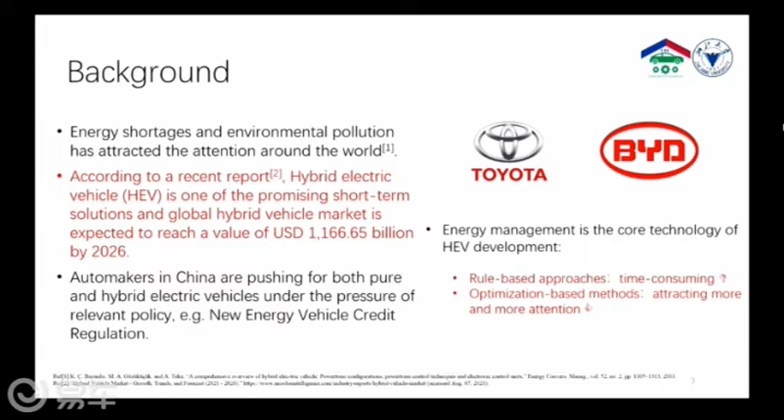As the core technology of HEV development, energy management is to coordinate the engine and motors or generators for optimized fuel economy. Rule-based approaches are still popular in real applications, but it is usually time-consuming. Optimization-based solutions are getting more and more attention from algorithm developers, which have the ability of capturing the entire problem. However, the optimal energy management problem is basically a nonlinear, constrained, and dynamic optimization problem.

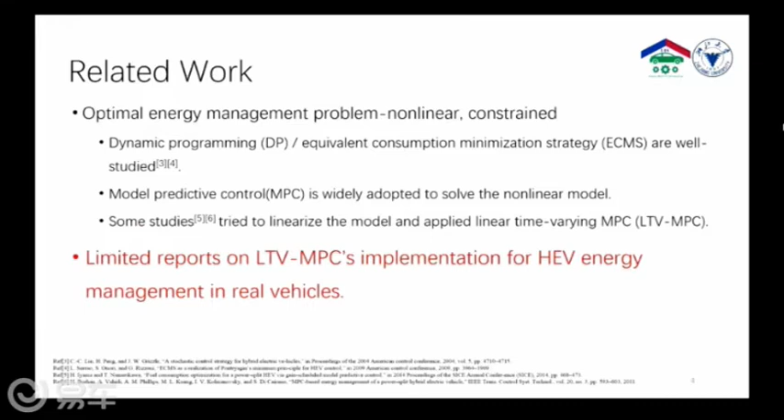Existing research is as follows. Dynamic programming or equivalent consumption minimization strategy are well studied. Model predictive control is also widely adopted to solve the nonlinear model, so it usually has the disadvantages of computing load and the difficult handling of nonlinear HEV models. Meanwhile, some studies have also tried to linearize the model and apply the linear time-varying MPC. However, there are limited reports on LTV MPC's implementation for HEV energy management in real vehicles. So, it's of great importance to propose a new LTV MPC algorithm and implement it on real vehicles.

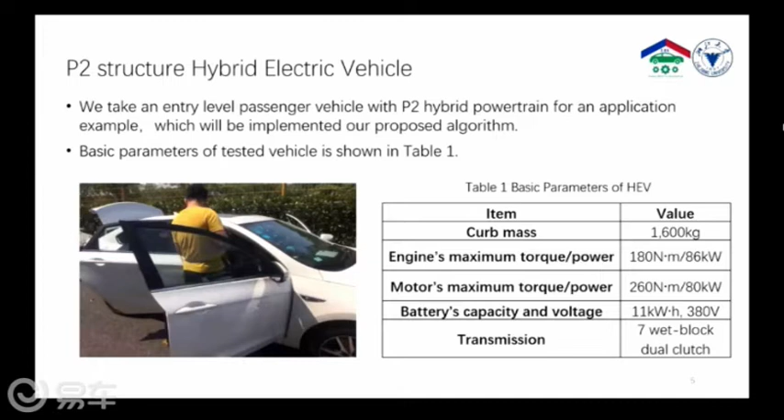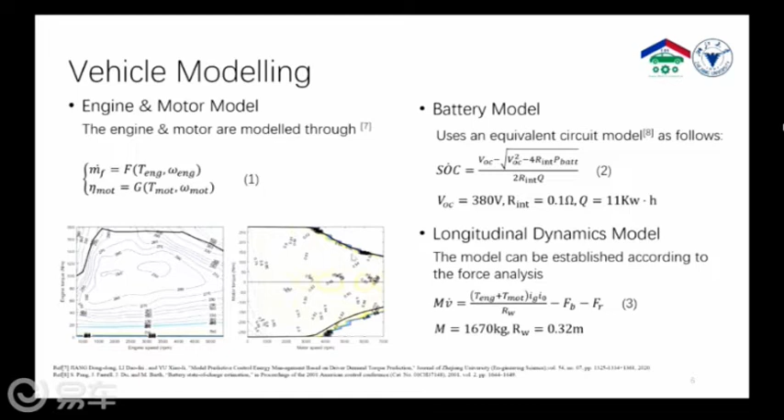As for the HEV, we take an entry-level passenger vehicle with P2 hybrid powertrain for an application example, with basic parameters shown in Table 1. Here shows how we briefly model the target HEV. The engine and motor are modeled with nonlinear functions f and g as equation 1, which is similar to that in our previous publication in reference 7. When modeling the battery, an equivalent circuit model from previous research is adopted, and the equation of SOC can be drawn as 2. As for the longitudinal dynamics model, it can be established according to the force analysis as equation 3.

For the MPC design, we firstly set the state variable x as V, SOC, and MF, continuous control variable U as T engine and T motor, the disturbance D as FR, and the output Y as V, SOC, and MF. Since the vehicle model has been established, we can obtain a nonlinear model of HEV by combining the above model equations. In order to linearize the model, Taylor expansion is adopted, and we can obtain equation 5, where system matrices are the corresponding Jacobian matrices of function f.

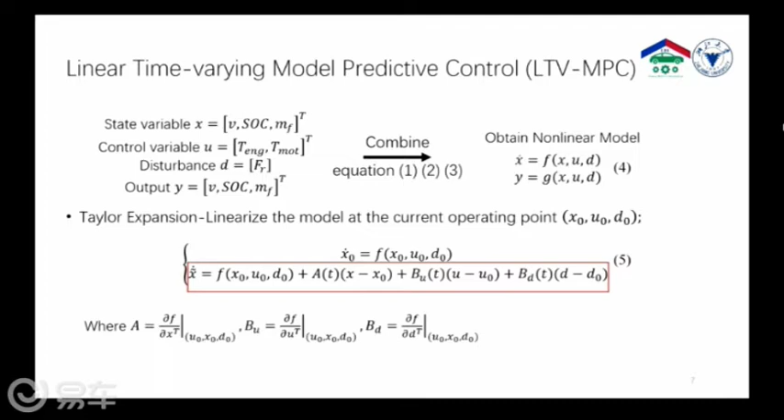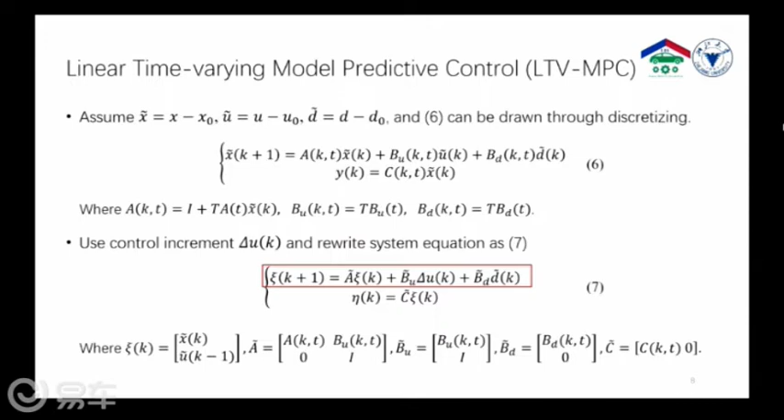Besides, the model needs to be discretized in order to be used in a real-time controller. Here we assume x tilde equals x minus x0, u tilde equals u minus u0, d tilde equals d minus d0. We can obtain 6 through discretizing, whose corresponding matrix is shown below. For the purpose of obtaining the optimal control variable, we rewrite the system equation as 7 by using control increment delta uk with matrices attached to it.

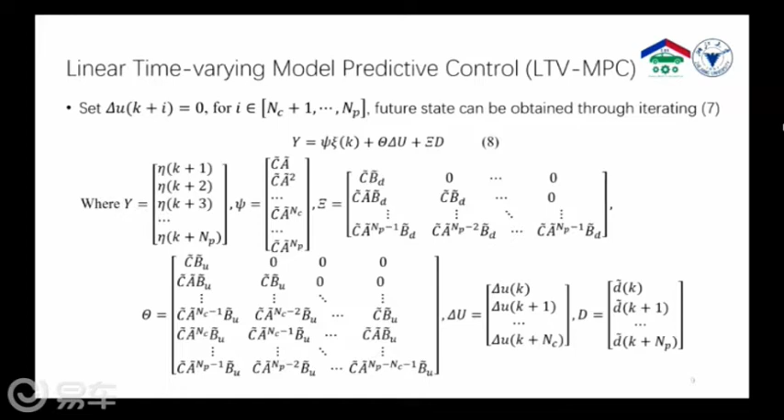We assume the prediction horizon as NP and the control horizon as NC, and set delta u k plus i as 0. Taking the state variable xk as the initial condition, the state 8 in the prediction horizon can be obtained by iterating equation 7.

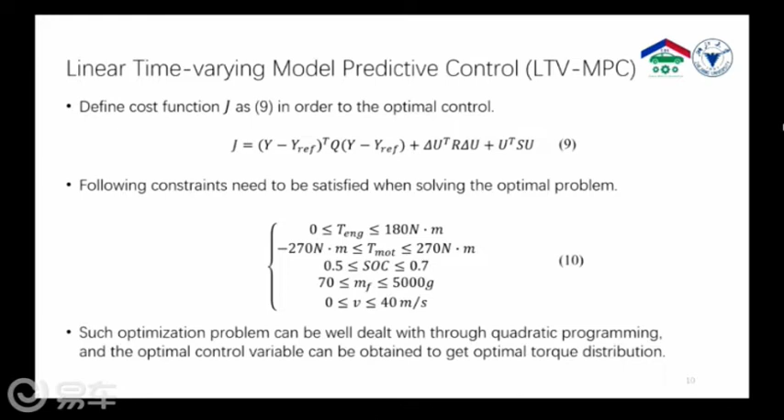To obtain the optimal control, we define the cost function J as shown in equation 9, including error between the actual output and the reference output value, control increment, and control magnitude. For the optimization problem, the following constraints need to be satisfied. For example, T engine has its maximum and minimum value as shown in equation 10. Thus, such optimization problem can be well dealt with through quadratic programming, and the optimal control variable can be obtained to get optimal torque distribution.

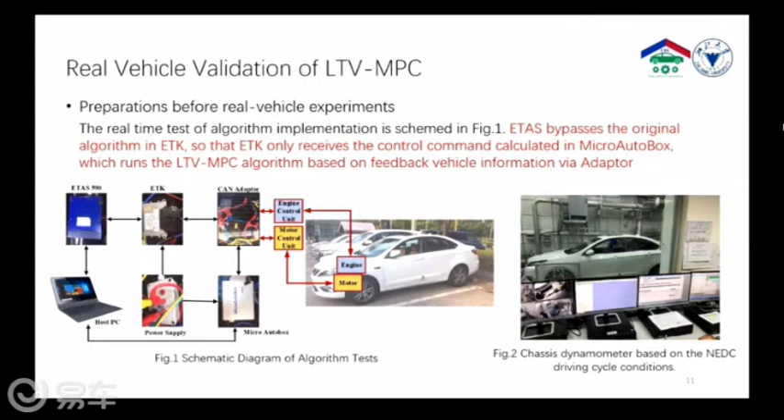Before real vehicle experiments, we need to adopt some equipment to realize algorithms real-time running on vehicle, which is shown in figure 1. ETAS bypasses the original algorithm in ETK, so that ETK only receives the control command calculated in MicroAutoBox, which runs the LTV MPC algorithm based on feedback vehicle information via adapter. Here, figure 2 shows the scene during the vehicle test.

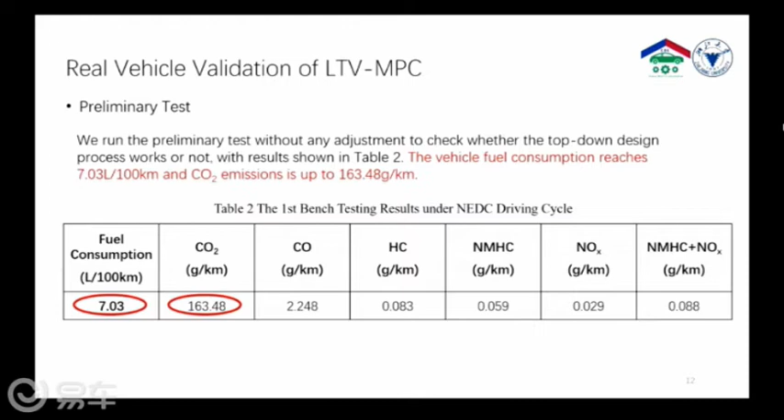We run the preliminary test without any adjustment to check whether the top-down design process works or not, with results shown in table 2. The vehicle fuel consumption reaches 7.03 liters per 100 kilometers, and carbon dioxide emissions is up to 163.48 grams per kilometer. Both the fuel economy and emission performances are far from acceptable, indicating that proposed MPC in section 3 is not satisfactory.

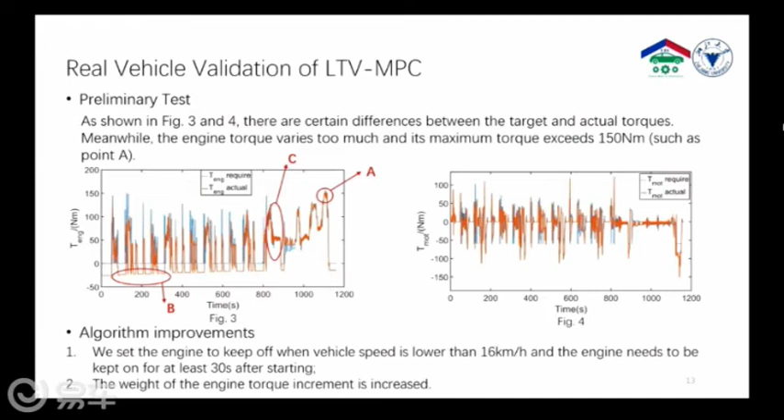To summarize, we speculated the following reasons. First, frequent start and stop of the engine, such as interval B. Second, the engine torque fluctuates up and down, such as interval C. Third, the peak of the engine torque is too high. Accordingly, improvements are adopted. First, we set the engine to keep off when the vehicle speed is lower than 16 km per hour, and the engine needs to be kept on for at least 30 seconds after starting. Second, the weight of the engine torque increment is increased.

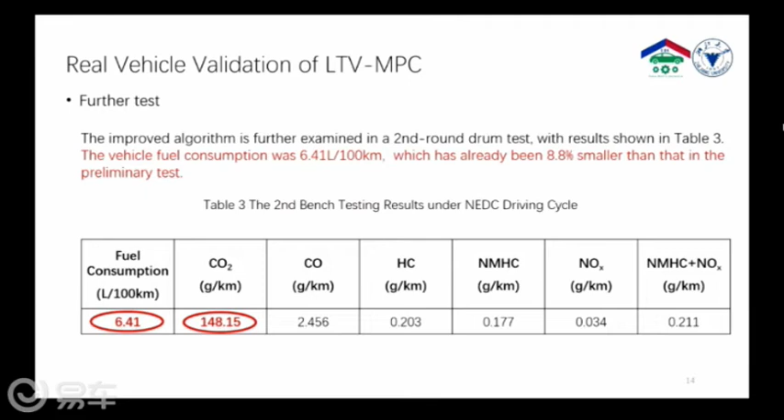The improved algorithm is further examined in a second round drum test, with the results shown in table 3. The vehicle fuel consumption was 6.41 liters per 100 kilometers, which has already been 8.8% smaller than that in the preliminary test. However, the pollutant emissions deteriorated to a certain extent, except for carbon dioxide.

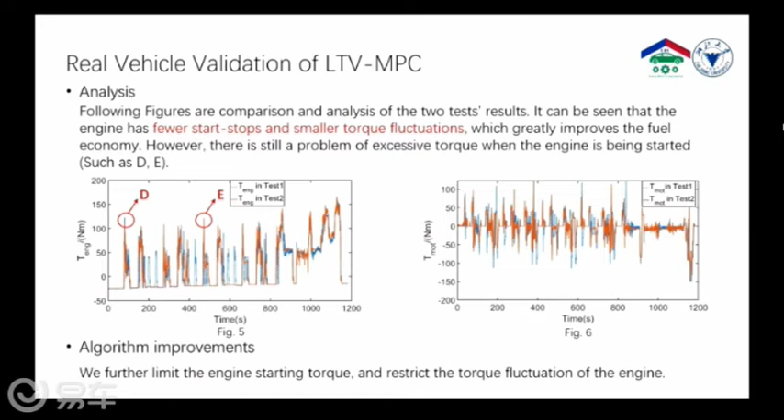Following figures are comparison and analysis of the two test results. It can be seen that the engine has fewer start-stops and smaller torque fluctuations, which greatly improves the fuel economy. However, there is still a problem of excessive torque when the engine is being started, such as point D and E. So, we further limit the engine starting torque and restrict the torque fluctuations of the engine.

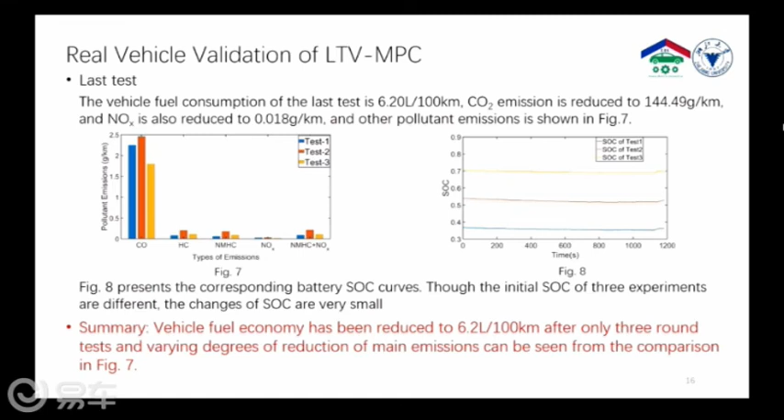To summarize, by applying our proposed LTV-MPC, vehicle fuel consumption has been reduced to 6.2 liters per 100 kilometers after only 3 run tests, and varying degrees of reduction of main emissions can be seen from the comparison in Figure 7.

To conclude, we propose an LTV-MPC-based energy management algorithm for a P2 HEV. We carry out multiple real vehicle experiments on a dynamometer to prove the feasibility of LTV-MPC. LTV-MPC can realize real-time running on real vehicle experiments. Besides, it can reduce the fuel consumption from 7.03 liters per 100 kilometers to 6.2 liters per 100 kilometers within only 3 experiments. Furthermore, main pollutant emissions can be obviously reduced through LTV-MPC.

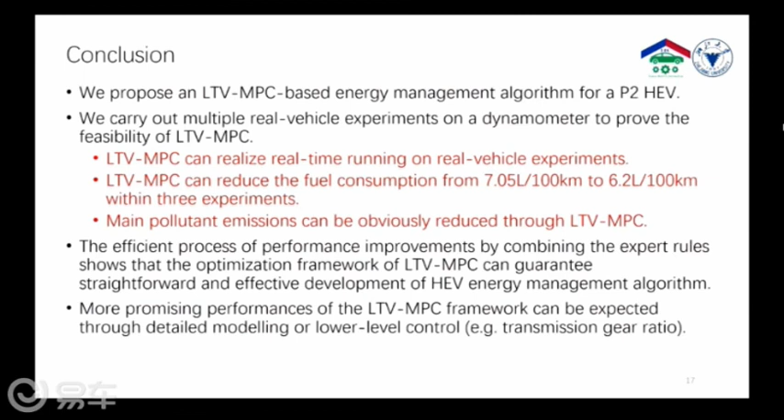The efficient process of performance improvements by combining the expert rules shows that the optimization framework of LTV-MPC can guarantee straightforward and effective development of HEV energy management algorithm. More promising performances of the LTV-MPC framework can be expected through detailed modeling or lower-level control, for example, transmission gear ratio.